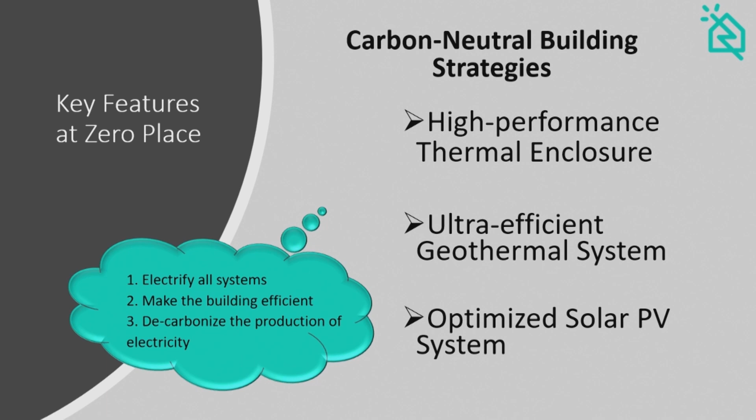The thermal enclosure consisted of ICF wall assemblies all the way up to the roof line, so that was 4 stories plus a penthouse, with thermal bridge-free construction, triple pane fenestration, high-R slab, and fully insulated roof. Putting all that together, they were able to achieve very aggressive air tightness detailing.

In terms of the whole enclosure, the tightness was about 0.6 to 1.0 ACH 50. And then there's a compartmentalization test, which is air tightness between apartments, that was also really quite tight.

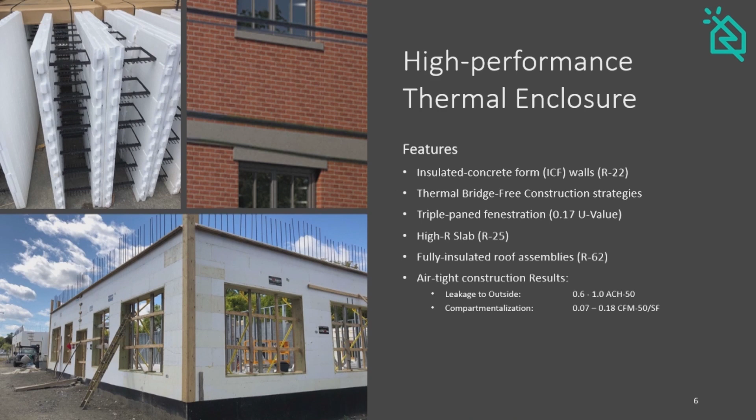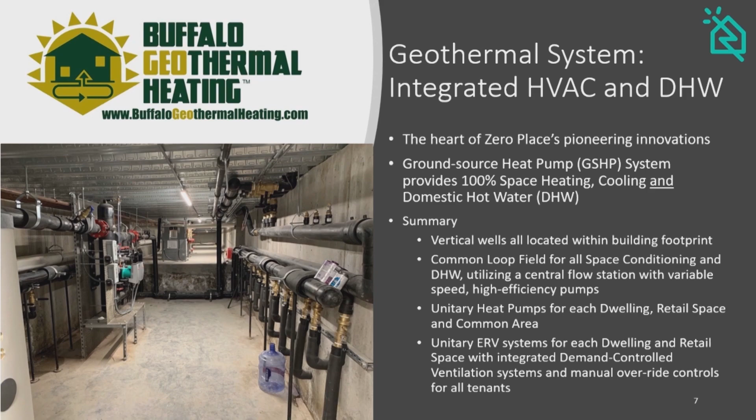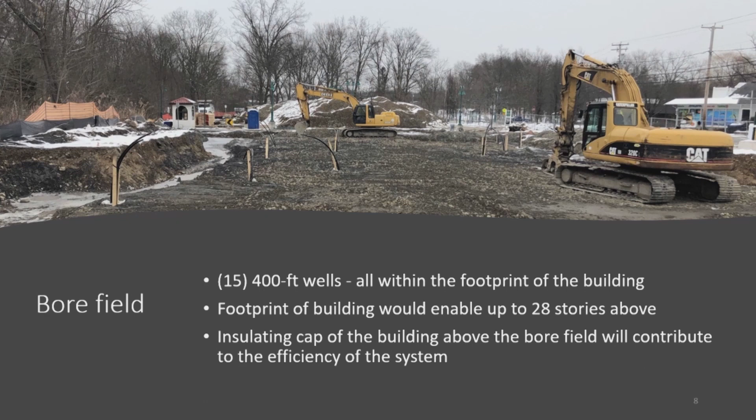So obviously the heart of the building in terms of its mechanicals is the geothermal system. I'm going to leave that to Jens to talk a little more in detail about how the system was designed and installed. These are just some shots about the well field, 15 boreholes. We've got a total of 64 heat pumps in the building, totaling about 94 tons of rated capacity.

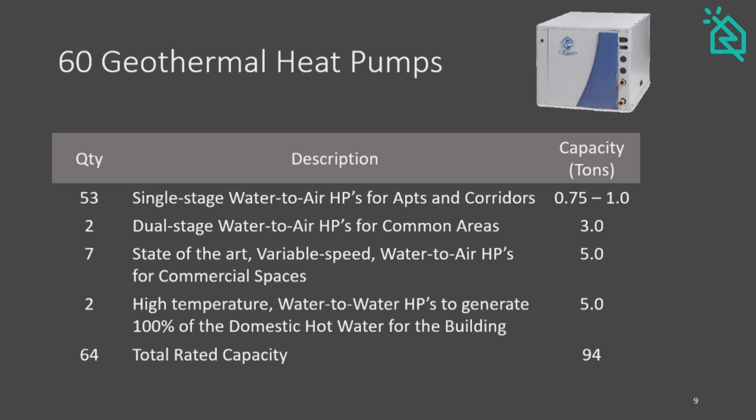And that includes not just space heating and cooling, but also an integrated domestic hot water system. Jens will talk a little more about that integration and some of its values. The key thing I'm going to get into in terms of overall energy performance is that we were able to get the domestic hot water down to about 10% of the total building load.

This is a centralized domestic hot water system, and I think that was actually a very inspiring result that we came up with, because in many high-performance buildings, they're still looking at about a third of the energy going to domestic hot water. So getting it down to about 10% was really quite an achievement.

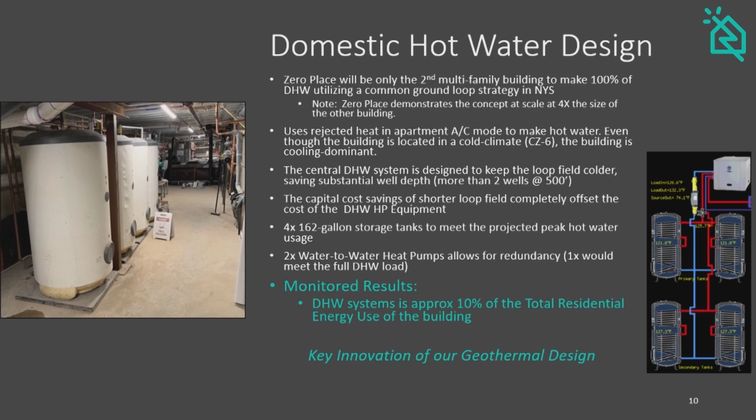Some other design features we'll be talking about later. What I just wanted to emphasize is that in terms of the design, even though the New York Clean Heat program allows up to 85 watts per ton, this project was designed for all its pumping power to about 15 watts per ton.

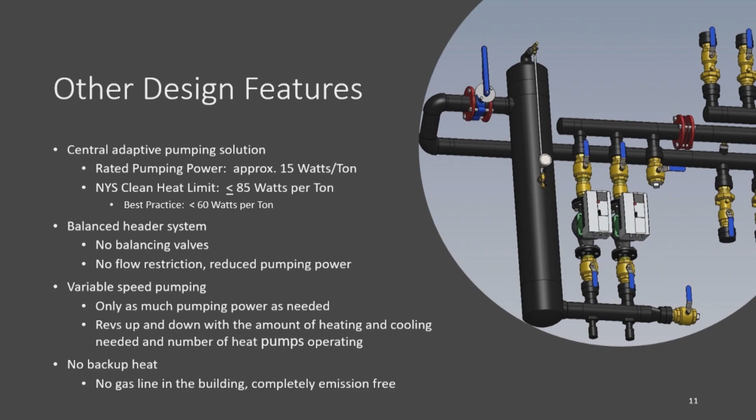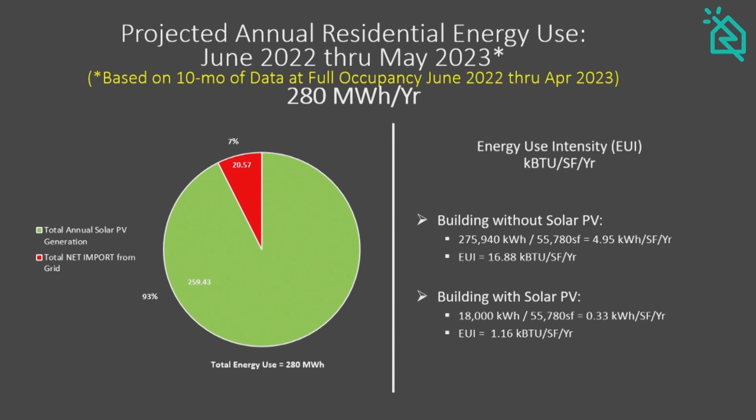In terms of the breakout between how the apartments and common areas energy use was split, we've got the large majority, about 63-64%, dedicated to the apartments, with the balance of about 37% of the energy dedicated to the common areas.

Now, to give a clear idea—the owners decided to have a master metered configuration, so all of the apartments and all of the common areas are on the building owner or landlord meter. The pricing structure for rent is an all-in model, where tenants pay one fee which includes their rent, energy, water, cable, phone, and internet.

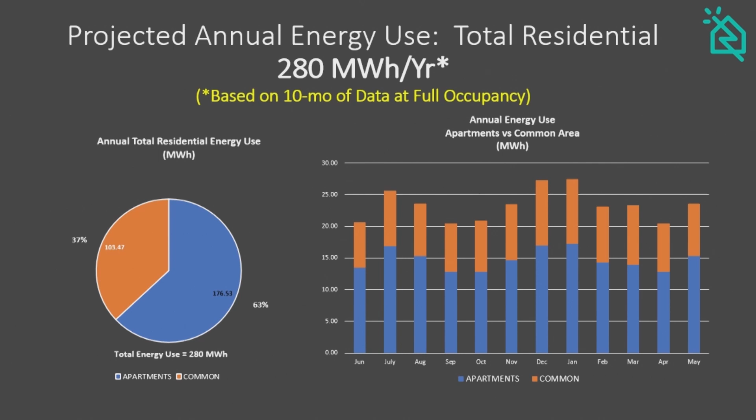It's all a package. So one way they have a backstop on energy use is they have explicit restrictions for commercial uses within apartments, as well as a kind of threshold limit on annual energy use per year. Those lease allowances were for one-bedroom apartments at 4,300 kWh per year, and on a measured basis the actual average came out closer to 3,200.

And then for the two bedrooms, significantly below what the threshold was set. In the lease, the way it's structured, if you go above the threshold, you just pay a flat fee—like $50 for 10% over, or another $50 for 20% over—so they didn't want to get into billing kilowatt by kilowatt hour. In general, the building is performing quite well, and the vast majority of tenants are within that threshold for energy use.

In terms of the GEO system, this is obviously a pretty exciting piece for us here at the conference. Again, we have one common loop, and then we have all the space heating and cooling happening off of that loop, as well as the domestic hot water.

A couple key pieces: the total energy for the GEO system is about 106 megawatt hours for the year. The other balance, 173, is all other building uses. Of the GEO energy, the apartments take up about 26%, and the domestic hot water is just under 30 megawatt hours per year, or 11% of the total energy use of the entire building.

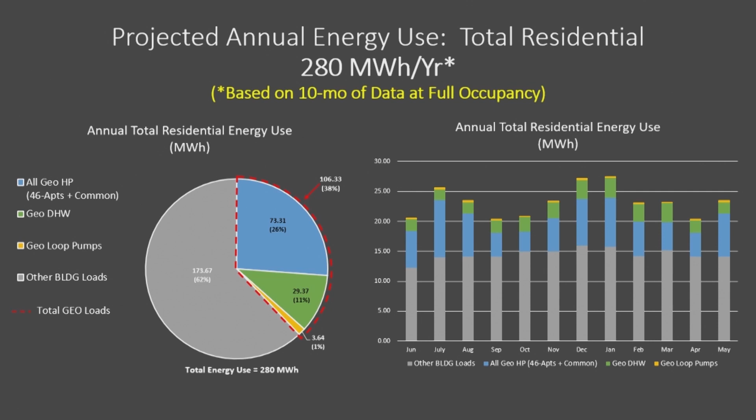Loop pumps: 3.64 megawatt hours per year, or just about 1% of the total building energy. So from our experience working on a number of multifamily buildings with geothermal, and seeing the typical 10, 15, 20 horsepower pumps, three-phase and so forth, to see these results was really quite staggering.

I'll end with these last two slides, which highlight one of the greatest concerns we had: peak demand. In the summer, during the hottest day of the year, the hottest temperature we recorded, close to 100 degrees, there was an overall demand or energy use of about 71 kW.

And that was after—hang on. So right here, you can see there was no solar production at that time. It was hot all day, and then people came home, appliances began to be used, maybe the air conditioning was bumped up a little bit, and the domestic hot water was actually part of that peak as well. So for 46 units, that's a pretty extraordinarily low peak.

In the wintertime, at a -6 degree day, there was a peak coincident with the coldest moment of that day this past year. It was about 49 plus kW, again without any solar production to offset it.

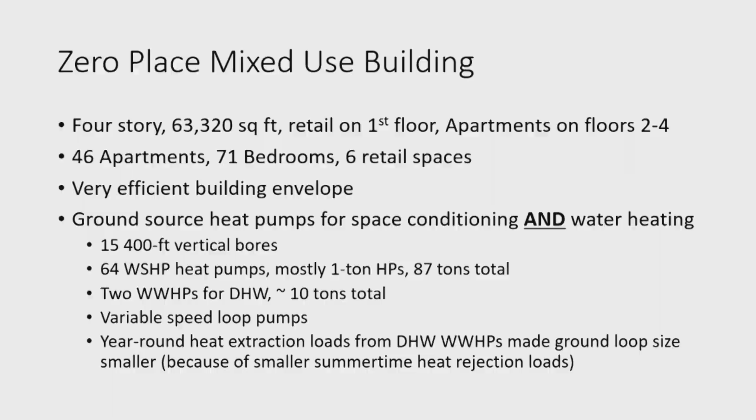I think everything else Pasquale had covered. Here's another picture—the one thing about a mechanical room for a geothermal building is it's kind of underwhelming. There's no mechanical stuff in the mechanical room. There's a lot of pipes.

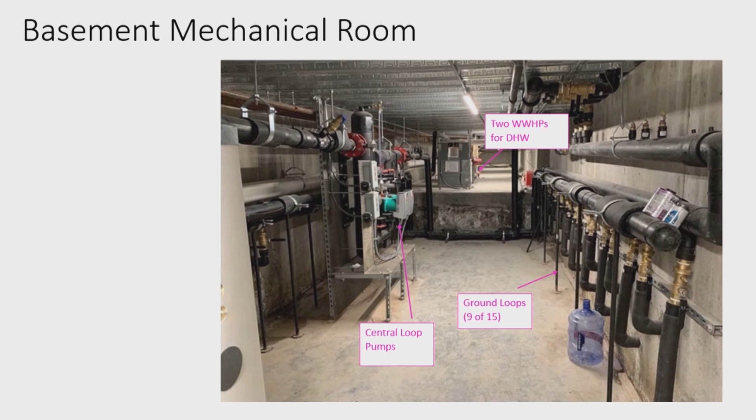But there were loops on both sides. In the back, those are the domestic water-to-water heat pumps that provide domestic water heating. And the central loop pumps, as Pasquale said, weren't 10 or 15 horsepower—it was 3 horsepower or 2 horsepower, with very low pumping power.

So here's kind of a schematic. NYSERDA got involved because they were interested in this aspect of the geothermal loop, adding in domestic hot water and what the benefits of that are. The building was already going to measure power, so what we did was add some thermal metering here. So I won't go into that.

You can see the red dotted boxes are the BTU meters that we added. We added a BTU meter on the ground loop so we would know the heat extraction and heat rejection rate, and we installed a high quality BTU meter to get a very accurate reading of that.

We had 2 BTU meters on the domestic hot water system. One measured what hot water was delivered to the building, and you get that by measuring the cold water in. There's a lot of water flowing around and returning, but what you use is the cold water going in, so we had a flow meter there.

The thing we did at this building that we've only done a few other times is we also measured the recirculation losses. You send hot water out, and in multifamily buildings there's always a recirculation pump that pumps hot water, making sure the hot water header is always full, so there's always hot water at the tap. We measured that as well.

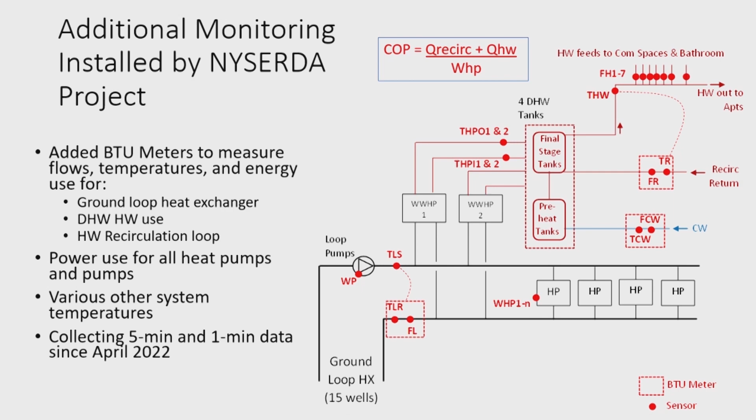Here's some of the energy results, focusing on the HVAC. The box in the upper right is from some work I was involved in with NYSERDA, where we had expected energy use for a new multifamily building. That's what's listed up there, and the baseline building had a gas heat system, so in theory we displaced about 17,000 therms of use.

Space cooling, we actually saw a little more space cooling use than expected. One thing that's kind of known in multifamily is that as the building gets tighter and tighter, you start to use more energy for cooling than for heating. Heating and cooling in terms of heat pump energy use were pretty equal, and cooling is probably going to work out to be a little higher.

The bars show the percentage of electricity use going to the space heating heat pumps, the domestic hot water heat pumps, and the pumps. The pumps in this building were extraordinarily low. Best practice is usually that pumps are about 8 to 10% of the heat pump energy use, and some programs used to have limits on pumping use around that order. We were 3 to 5 times lower than that, depending on the season. It was designed for low peak pumping power, but the variable speed nature of this actually did pretty well.

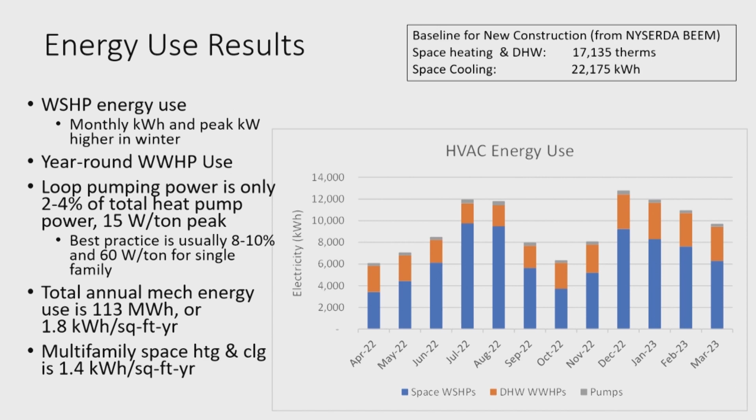So if a geothermal system is working properly, it's not very exciting, and this one is not very exciting.

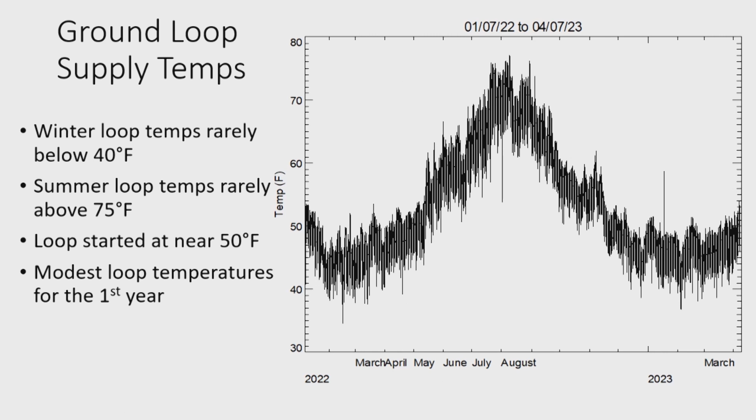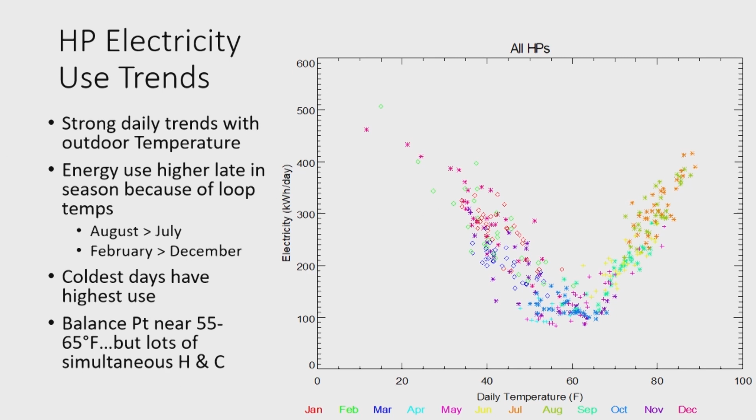The other kind of surprise is that there's lots of mixed operation at moderate conditions, around 60 degrees—we never dropped to zero. The fact that energy use never went to zero on a daily basis implies there's lots of mixed cooling and heating going on. Looking at the heat pump operating patterns across 46 apartments, everyone is doing amazingly different things—I'm always amazed at how much variation there is between people. In the end, it looks like our balance point is in the 55 to 65 range, with lots of simultaneous heating and cooling, confirming that as a multifamily building gets extraordinarily tight, cooling starts to become more important.

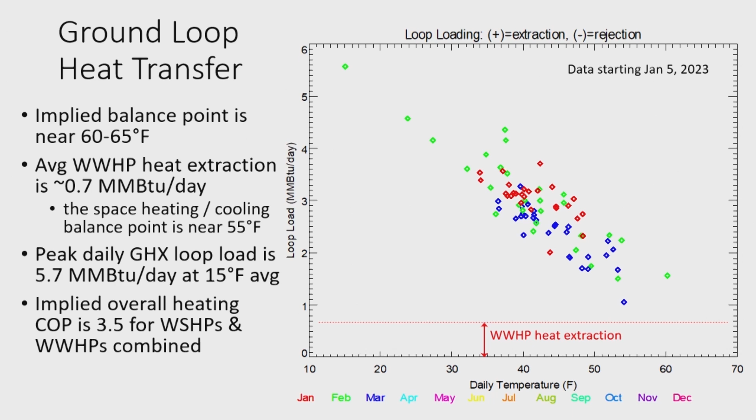Okay, now I'm going to focus on the water heating system. This has two water-to-water heat pumps, configured with two stages of tanks—what I call a preheating stage and a final stage. The recirculation water comes back between the tanks, which is important because that recirculation loop runs all the time. If you just had a single tank, you'd have totally disrupted the thermocline and really hurt performance. With a preheat tank, you have much lower temperatures coming into the heat pump, and it works better.

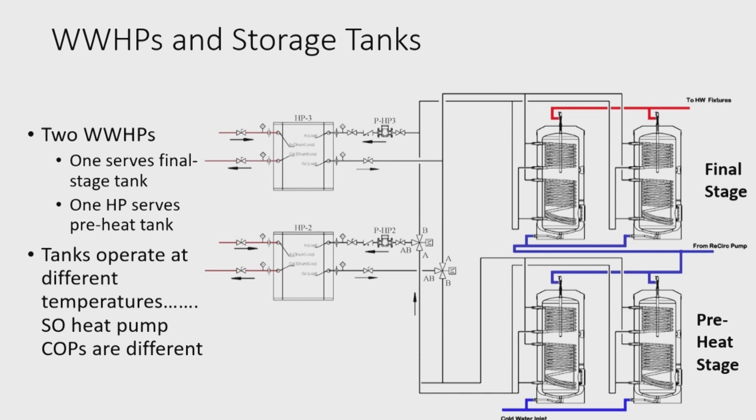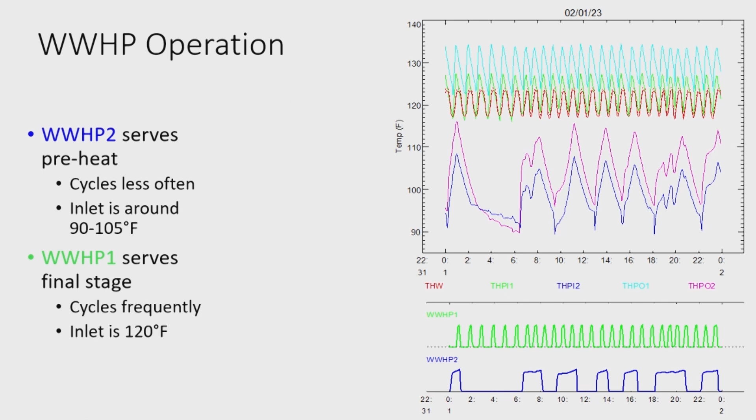If you look at the top graph, it's the temperature. The bottom two, purple and blue, are for the heat pump serving the preheat stage, which sees a lot colder water coming back, so it's more efficient. The green and red show that heat pump always saw 120-degree water coming back. This is why, if you're going to have heat pumps, you have to think about having two stages, and your preheat stage is always going to work a little better.

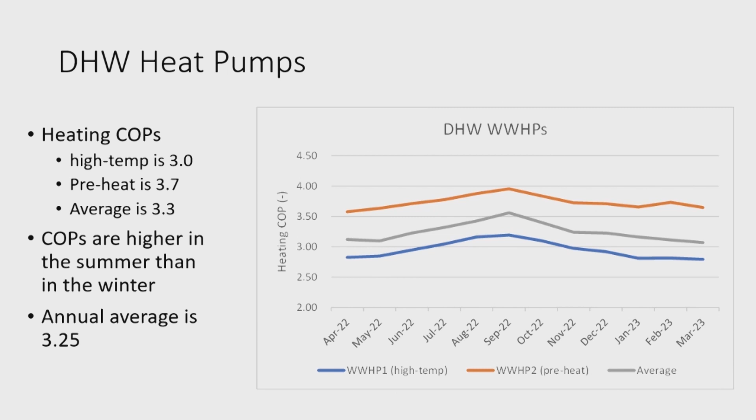The COPs behave as you'd expect: the loop gets warmer in the summer, so the heat pump doesn't have to work as hard and the COP goes up. In the winter it's a little colder, so the COP goes down a bit. The preheat stage heat pump has a COP of 3.7. The one serving the high stage, which cycles a lot and has hotter water, has a little worse COP, but the overall average COP we came up with is 3.25. That's pretty good, probably better than you could achieve with any air-source commercial water-to-water heat pump.

To focus on water heating a bit, since I think that was a pretty important part of this: the average use for this building varied a little across the year, but by the time you got to June, the building was occupied and we were using 1,200 to 1,300 gallons a day, which comes out to 18 gallons a day per bedroom, about where we expected it to be.

I've been involved in monitoring other domestic hot water systems, and one thing we've been seeing is that peak flows in multifamily buildings are much lower than code assumes and people expect. The highest flow we ever observed in a 1-minute period at the 99.9% level was 6.2 GPM. We did have one event at 9 GPM.

This is why plumbing codes are about to change soon, and there's data from other buildings confirming this. You have to remember the building probably has a 3 or 4 inch supply line going to it—3 inch, actually—so that's a little big for 6 or 9 GPM. This all adds cost and makes losses higher.

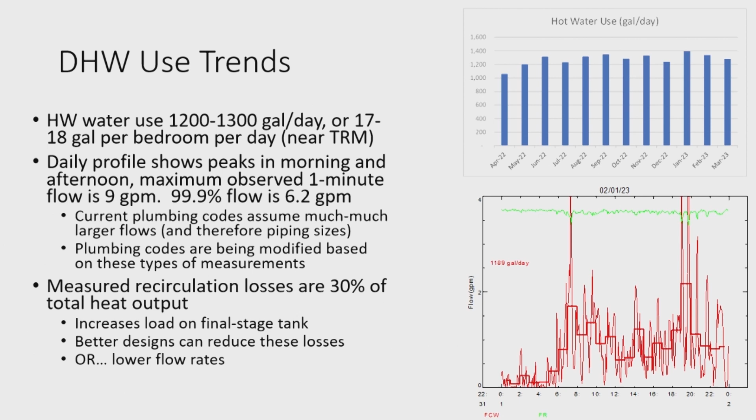The other key thing is that in our measurement of recirculation losses, consistent with other buildings, we've seen that recirculation losses are about 30% of the load the heat pump has to meet. So recirculation losses are a huge part of where the heat is going, and of course it increases the load on the final tank and makes it cycle faster, as you saw.

What I'm going to show next is a little experiment—in a couple of slides I'll show the impact of making some changes. Here I wanted to show that we were supplying 120-degree water to the building. If you look at the cold water line, the minimum is roughly the city water temperature, which gets as high as the high 70s and as low as 40 or 45 degrees.

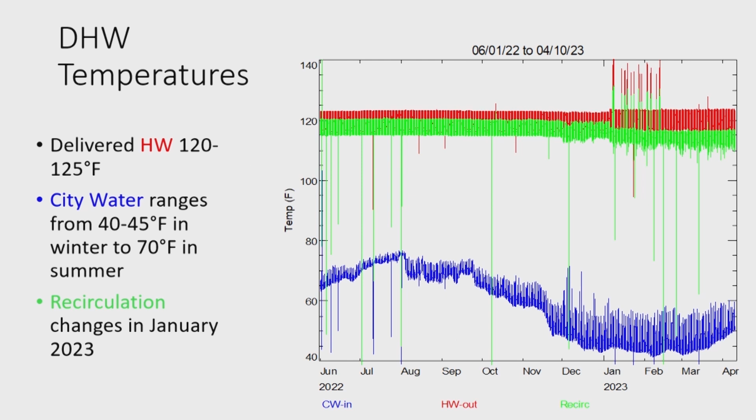As a preview, you can see when we made some changes to the recirculation loop, our delivered hot water actually went up and our recirculation temperature went down. We turned down the recirculation loop from 9 GPM to 4 GPM. Does anybody know why recirculation flow is 9 GPM? Because that's the only pump you can buy at the plumbing supply store. So we cranked it down and got to 4 GPM.

There's a risk that we might not have enough recirculation flow to maintain hot water everywhere. But if you look at the recirculation temperature, TR, it was still 112 degrees, so we still were good.

The savings we got from doing this were on the order of 20 or 25% just from making this change one day. And we probably could go lower. We may do this a little bit in the future, but I think the flow could be 1 or 2 GPM.

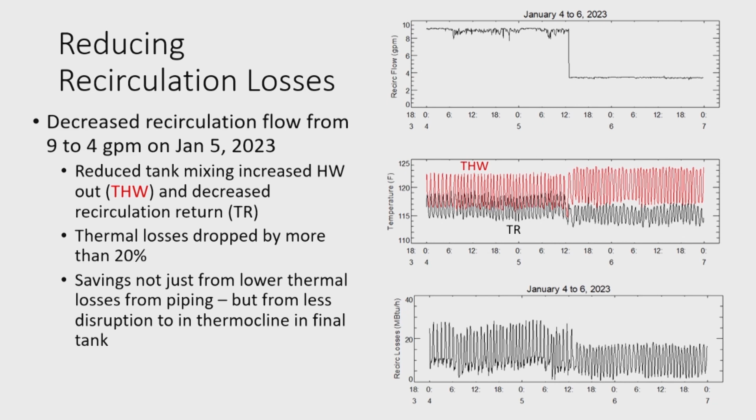And you still would not be starving people of hot water, which is what you want. The key thing is these losses do not come from piping losses probably. It's not just thermal loss from the piping, it's the disruption to the tank and the thermocline in the tank. If you're always flowing at 9 GPM, your tank is mixed. In a hot water system, you'd prefer the tank not to be mixed. You'd prefer the hot water to be at the top and the cold water to be at the bottom.

And over pumping just makes that a problem. So yeah, peak demand. This is kind of the same thing that Pasquale said, but it's focusing on the heat pump itself.

July 20 was the day when I had the highest peak use for the heat pumps themselves. You can see the outdoor temperature was 90, and I give the demand of all the components. The solar system was putting out 10 or 15% of its max output, putting out 30.

One point about this is I think everybody knows that if you add solar to a building, you have not reduced the peak demand of the building. Peak demand of the building and the peak impact on the utility is still the same because the peaks always happen after the sun goes down.

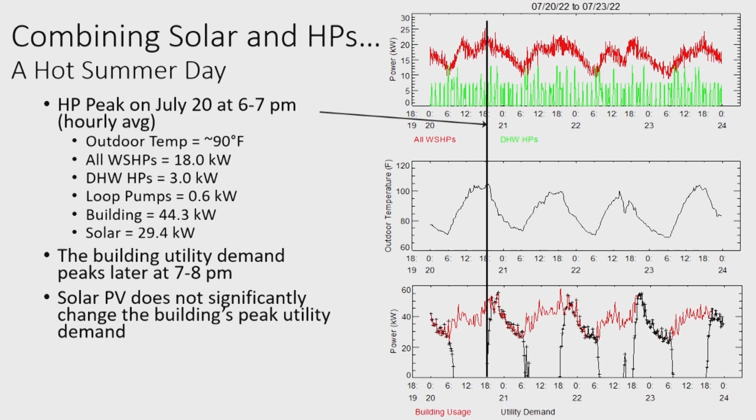One thing that's interesting, the actual building peak happened later than the heat pump peak. Most people assume that a building peak happens because of air conditioning, but in this building, the building peak was not primarily driven by air conditioning. So very interesting in that sense.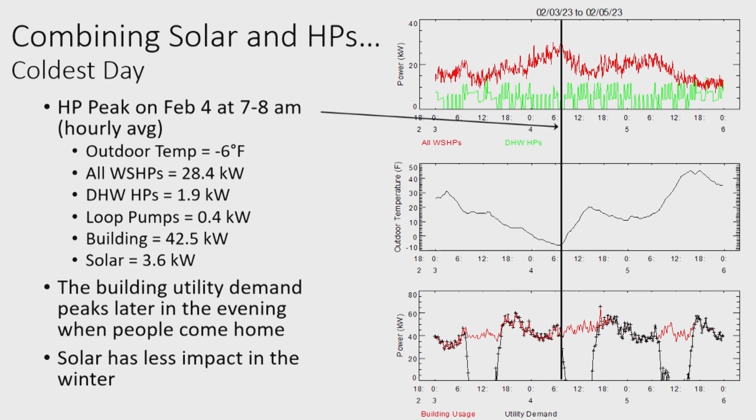So kind of a takeaway on the M&V thing, I think the ground loop is working perfectly. And the heat pumps, the energy use for both space heating and water heating were very low, and pumping was extraordinarily low.

And adding, Jens is going to talk about this more, but adding domestic hot water, you don't need to make the loop any bigger. You actually can make it smaller. I think Jens had proposed a deal to the owner kind of based on that logic, and we confirmed it.

So we're getting the domestic hot water heating loads right where we expect, and we have a COP of 3.25, which is probably better than when you get all said and done with an air source unit like a Sanden or other system that can do domestic hot water by extracting heat from the air, which is probably going to be in the 2.5 to 3 range. So we're doing a little better than that.

The other thing is, everyone builds good buildings, but all buildings have 30% of the energy use go to recirculation losses. I think Tatum at a building in Ithaca found 37%. Our field testing of some sites in upstate New York on old multifamily buildings was about 30% too. So this is sort of the last frontier. If you want to make the building efficient, you should pay attention to the domestic hot water system. And I think that's it.

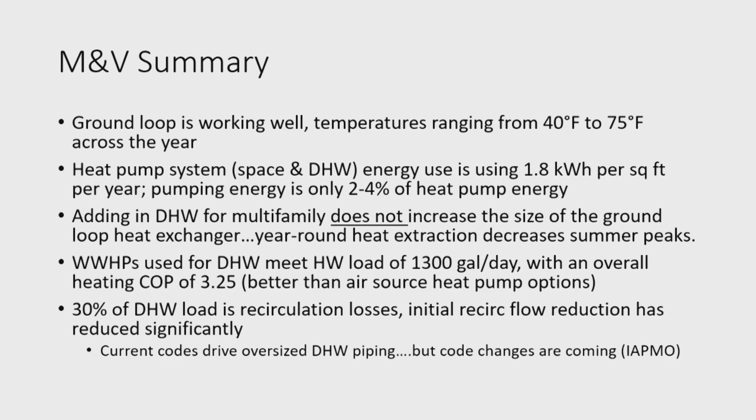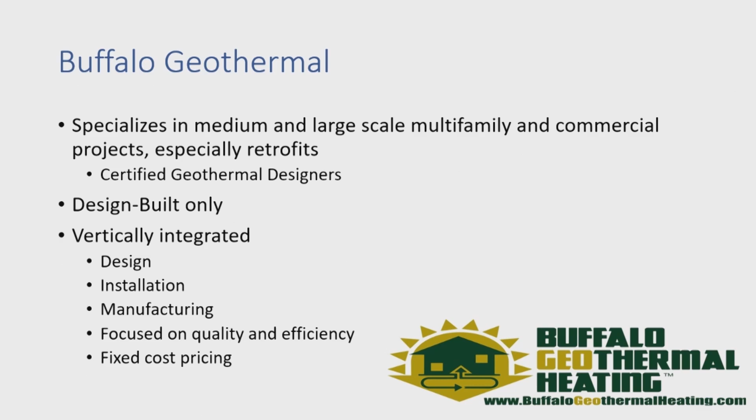Yes, I want to add a few things here. That's what we do - we design-build those systems directly. We usually don't go through a spec and bid process. All the materials, the manifolds, the pumping integration which makes all this efficient, we have vertically integrated in our company, and we pre-build them in that fashion. We give people a fixed price - this is what it's going to cost you. And we pride ourselves that unless you change the scope on me, there's no change order. So they already get value engineering.

Just want to highlight where this is - it's in the middle of the Hudson Valley, very cold winters, very warm summers. It's not just what we call it, the building is actually called Zero Place. It filled up very quickly because a lot of tenants appreciated the concept of having all the energy costs included. The developer wanted to keep that very low for him, and that's why they went the extra length here. The awnings are also solar panels on the southern side, and the elevator shaft has solar panels squeezed up there too - everything we could do to maximize that. It looks like a spaceship from above, but you don't see anything from below. That's the whole concept - maximize this.

Just to point out, Pasquale has shown some of the pictures. I want to point out these are only 15 boreholes, that's it, and they're not even 500 feet down, they're actually 400 feet down. We could have put enough directly under the footprint of the building to actually support a 30-story building above it and still have it all within the footprint. So that's really the take-home message - that we can do this now. We're starting to learn how to squeeze more BTUs out of it and do that in really, really large buildings.

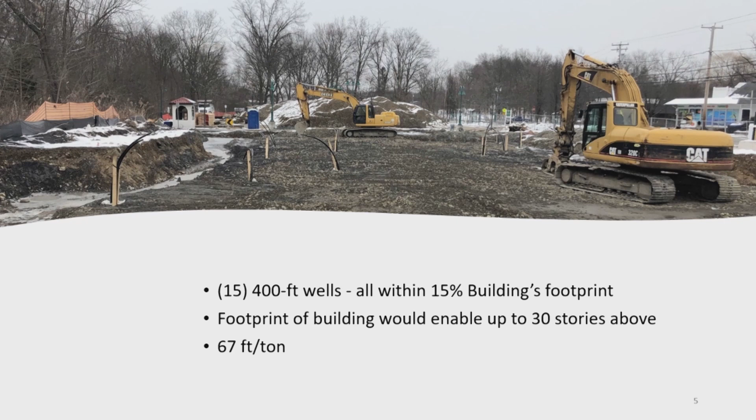Looking at the tonnage connected to this, we're at 67 feet a ton. Normally it's like 200 feet a ton, or 150 - that's considered borderline. Look how well this performs and how little infrastructure there actually is. That's what we're trying to do - value engineer this from the get-go and get data from it, stream live data so we can learn.

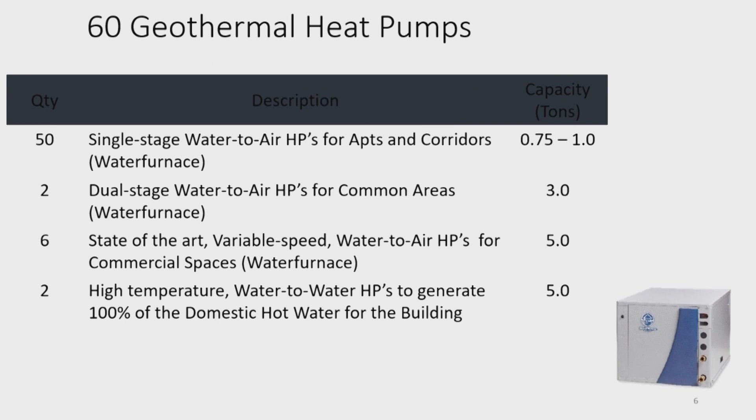WaterFurnace heat pumps in this project - and Hugh has already touched on the design stage. That's something we thought about - how can we actually improve the performance of it. One thing he pointed out, it was weird when I came in and said, let's do the hot water too, and I'll give it to you for free. Everybody goes, what are you doing? No - I want to have the hot water there because I need it to cool the loop in the summertime. That allows me to make the loop smaller, and the money I save with this, I can buy all the equipment and give you hot water for free.

Whoa, this is too good to be true. Okay, let me do this. And that's what we did.

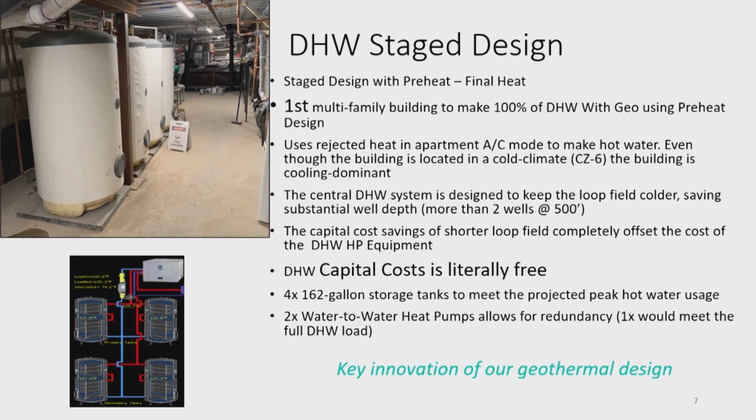So the whole point is that we get the average pumping power down to about 400 watts. Normally, I've seen systems where a 2,000 square foot home uses 400 watts for pumping power, correct? This entire building doesn't use more on average - and there are 60 heat pumps on there. No balance valves, no flow restrictions - focus on efficiency, get your pumping power down. Obviously the key is the variable speed pumping, where the pumps control themselves. They sense how many heat pumps are online by measuring the back pressure - a valve opens up, a pump turns on, the pumps in the basement sense that and speed up and down based on that. That's really the key.

So they know exactly how many pumps are operating and how much water flow is needed, and they throttle back when they're not needed.

And just to emphasize, there's no backup heat. There's no electric heat element anywhere in the whole building. The only gas is a line that goes to the emergency generator, that's it, it's not even entering the building. So the entire building is completely emission-free.

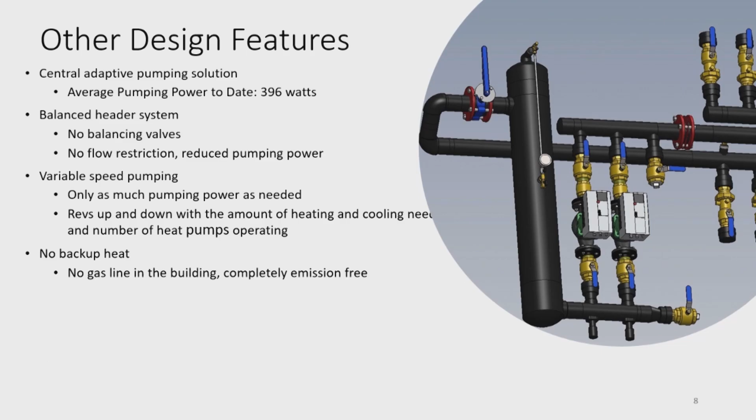They're exposed to colder water. The water they're seeing, whenever there's a big water draw going on, normally they are running around 100, 110, or 104 degrees, and that allows us to operate at a much higher efficiency.

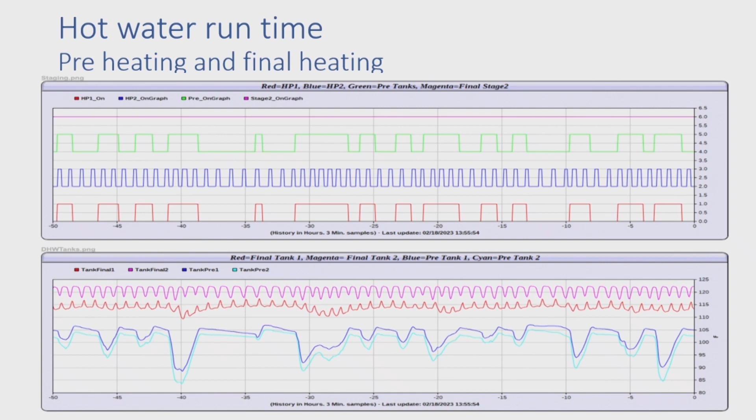And then we have to bring the water up to 120, but we're only doing a 20-degree lift at the max with the second stage. So yes, it's less efficient, but the heavy lifting to bring up water to 100 or 104 degrees from 45 or 50 is actually done at a much higher efficiency that way.

That's the trick. Now this looks like a terrible graph, so let me walk you through it a little bit. This is looking at different portions of the building.

You can see this was actually in the winter, in February, where some of the apartments are operating in air conditioning mode on the southern side. It's a sunny day, and this is 0 degrees here, and some of them are actually rejecting heat into the loop field right now.

Actually, the southern portion of the building and the middle portion are rejecting heat. The northern part of the building is taking heat out, and once in a while hot water heat pumps turn on and take a lot of heat out. But overall, they're exchanging heat between each other, and the loop field isn't really very affected by it.

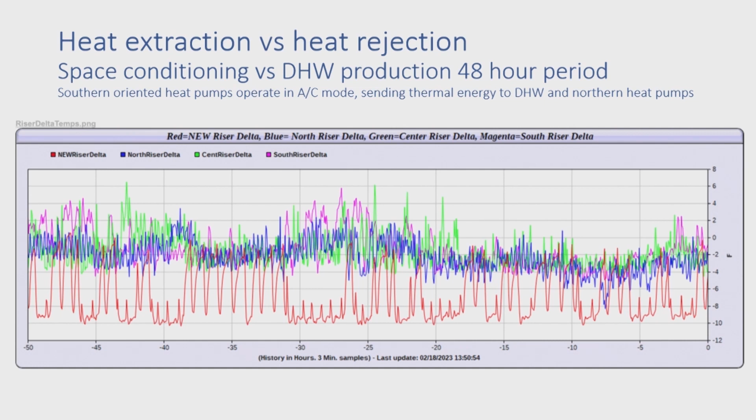So that's the art. We don't waste anything in air conditioning mode by rejecting it into the atmosphere, only to turn the boiler on next door to make hot water or heat another apartment. That is part of the value proposition of geothermal.

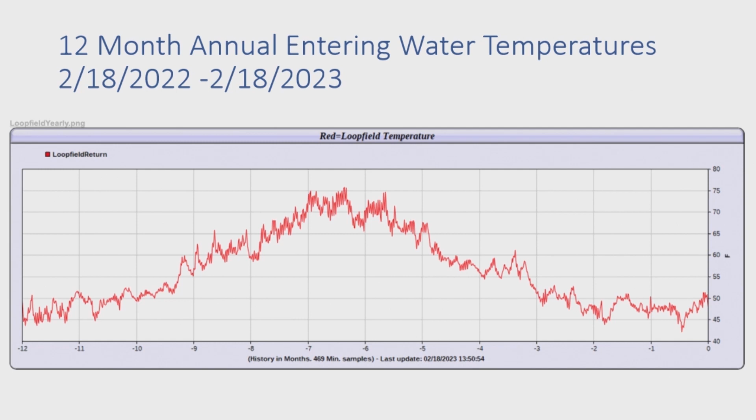We're going up, every single BTU gets brought into the loop field and stored there. We can measure this, and we can also measure how much we're getting back during the heating season. We also see that it stabilizes here. We're not into phase change yet, but it's extremely stable during the winter time.

That thermal battery is reacting to input and output. It immediately reacts by increasing or decreasing its delta T, and that's how it delivers more or less energy, whatever you need. It's like a battery which delivers as much energy as you need.

And it actually does that — this is essentially for a 48-hour period, and we can measure that now. As it gets colder, it automatically increases its delta T and gives you a constant thermal energy back. It acts essentially like a grid battery, balancing the grid. That's how it acts.

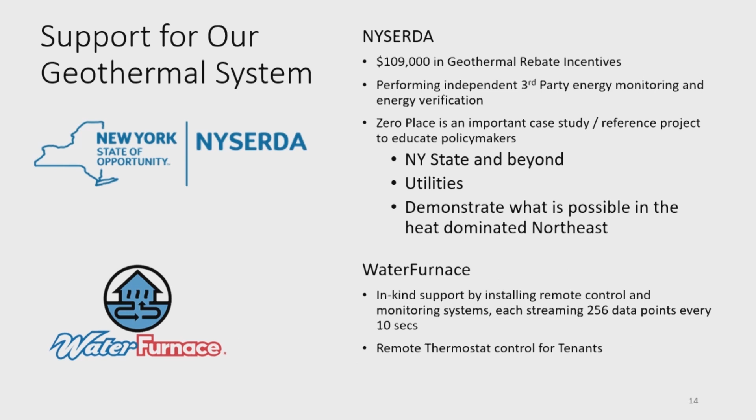So on a side note, this is actually giving some remote controls here for the tenants, obviously, to control their thermostats, etc. But this is why we have a treasure trove of data and can really see it in a granularity, and we understand what actually is causing energy use, etc. So that's the important part.

Thank the project team here. This is not just me, that was a whole enthusiastic team to say, let's show everybody what can be done and what the result of that is if we're doing everything right. So this has really worked out well.

I think to demonstrate that, again, we won't have a peak impact. The grids will not collapse if we're doing this right. So this is not only that we say it, but we monitor it, we measure it, we're staying away from the data, we let the state do it themselves and confirm everything. That is the impact.

Anyway, I'm going to be quiet now and let JR do his magic. Okay, we're going to test the dilemma between your curiosity and your hunger.

So great job by the panelists on all the data that's been collected on this building. Truly makes it a unique envelope, a unique structure, and the performance is stellar. So go ahead, Matt. Very well done, guys.

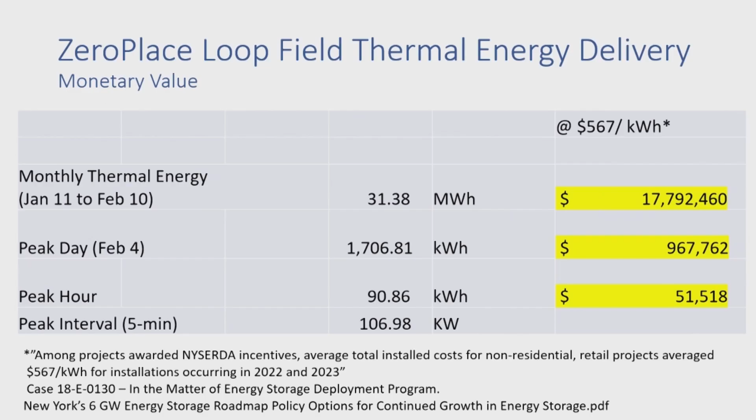Can we, I have like a zillion questions. I can also follow up with you guys. I know where you live, at least digitally, some of them. Online, but can we go back to the green, the graph with, I think it was Pasquale. Pasquale's pitch. Okay. Pasquale's green triangle above the thing on the peak day.

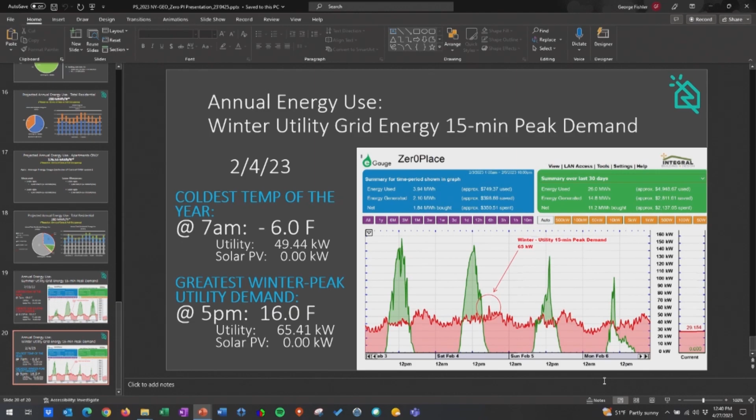Yeah, right there. Yep. So that's the winter peak. Yeah, that's good. So what's happening in the building before the winter peak, right? So you've got that big green triangle. That's solar. That's the solar during the day. It was a sunny, cold day.

Just real clear, put the pointer where you're talking about there, the mouse. Yep, I think it'll work. Well, the dark red line is the total energy use for the building. The red shaded area is energy imported from the grid. The dark green line is the total solar generation. And the green shaded area is solar energy exported to the grid. So the white is solar energy used during the load, to satisfy the load at that time of generation.

Got it. So the net, in this case, for these days, would be total energy used minus the amount of energy generated. So what this essentially indicates is that even during the peak day, you exported energy into the grid because the building was not using that much.

Well, right, but for this period, which I believe is, it looks like it's a 1 day or 2 day. Right, that makes sense. Right, coldest day. But there was still some energy purchased or imported from the grid.

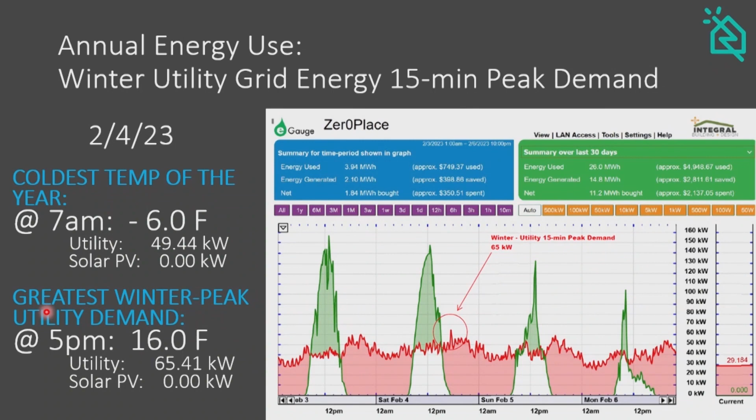My point was that I don't know what drove the peak, but it wasn't the heat pumps. Normally people think the summer peak condition is driven by air conditioning, but in this case that wasn't true. It was plug load from occupant activity.

It might have been the water heating system. Well, no, I covered that. The heat pumps and domestic water heating system did not drive the peak of the building. So it was occupant activity with plug load - I think it's people, a lot of Netflix. Not to say the heat pumps weren't on or weren't high, but the peak moment was not driven by the HVAC.

Keep in mind they have an electric stove - this is a fully electrified building. I think a better way to say it is that the peak of the building was not coincident with the peak of the heat pumps. That's correct, it was not coincident - certainly contributing, but not coincident. That's a little counterintuitive to the way we think about daily and seasonal coincident peak load for a utility and the demand on a building.

Okay, and then you had a second question about open loop. So I called it open loop control - that's my word. What I'm saying is it's not a traditional system where there's a pressure sensor out in the building and the VFD on the pump is being controlled by that. The pump is just deciding by itself how much pressure it needs. It's sort of sensorless variable speed control.